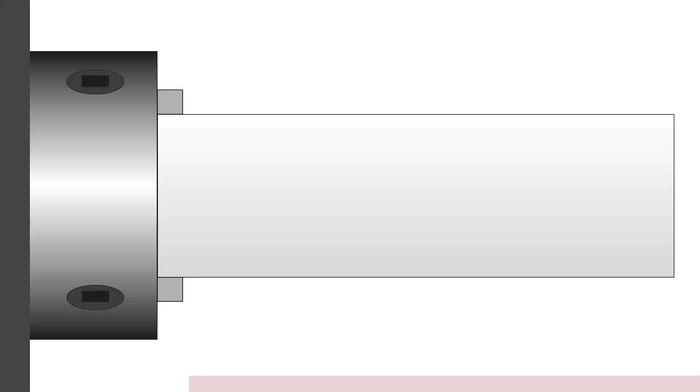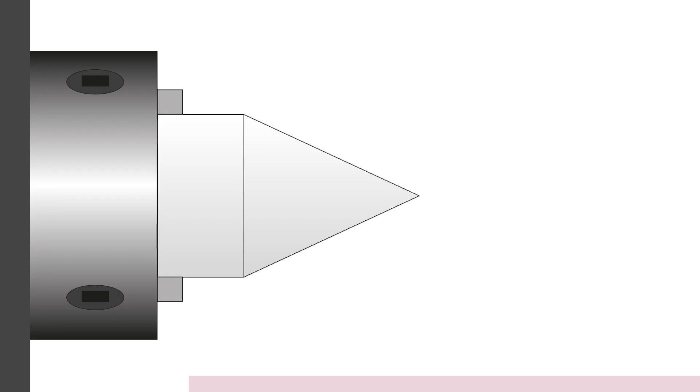The first process would turn down some of the end to the right dimensions and do the threaded internal hole on the inside. And then it would flip it around, and then on the other end you would create the cone, which would then create your ideal one-piece plumb bob, all to dimensions.

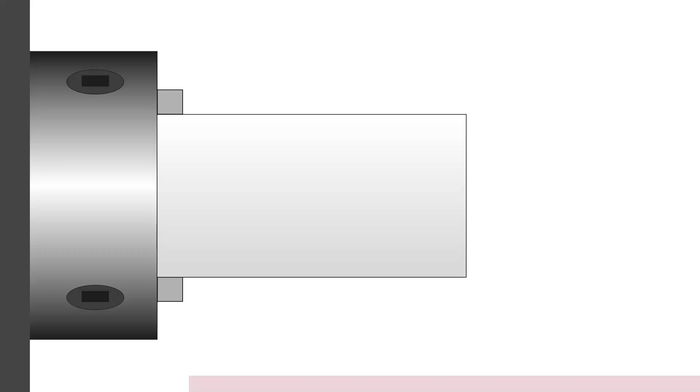But if I show you how we're going to do it, just because we don't have the length to play around with on our lathe, we are going to have the acetal set in the chuck, but the length of the billet just for the shaft part. Then if I show you this picture, this is where the machine will cut that shaft part, leaving a tiny little 12mm shaft right at the end that will go into the hole of the head.

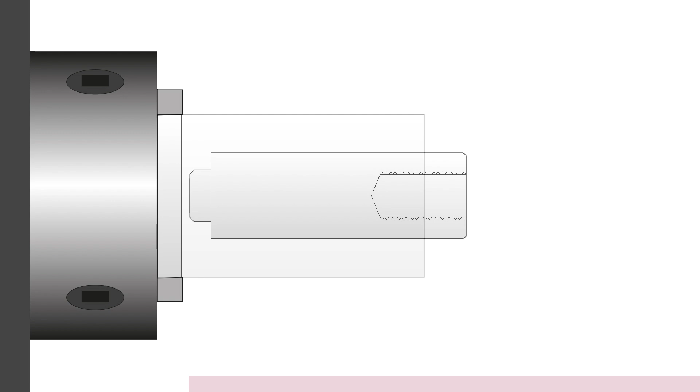Then we put in another billet just for the head piece, and we're going to cut an internal hole which is going to match the shaft of the other piece we've just made. And then we flip it around in the chuck and create the cone section. That'll leave you with two sections like this, and from there should be a nice friction fit of the two pieces together, and we can always add a little bit of adhesive to keep those together for this project.

The only other difference we're going to make is to the threaded section, because a tool has to come and obviously drill the hole first, so a drill bit comes and drills the hole, then the boring tool will come to basically extend that hole, and the diameter of that hole will increase, and then the internal thread cutter tool would come in and cut the threads.

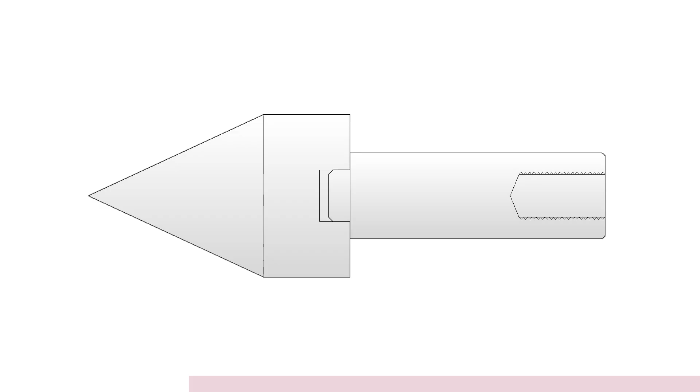The issue we have is the threads in the design that OCR have given us are too small for the lathe that we have, so we've amended that also to pretty much do an M14 thread pattern, a fine thread pattern. So the pitch of the thread is exactly the same as the M10 which they're specifying, but it's actually going to be a bigger hole, which should match the 14mm thread. So with those amendments made, we'll still be able to create an accurate plumb bob, but there's just a few different things that we have to do to get around it.

So heading over to TS Design, I want to set up the document so we can start drawing out the CAD file for the first part, which is the shaft part. So for this, I'm going to change the layout of the page and how it works. You're probably used to seeing it just like this, maybe with a blue background, but I don't like this shadow piece on the background here because it makes it harder to see where your measurements are.

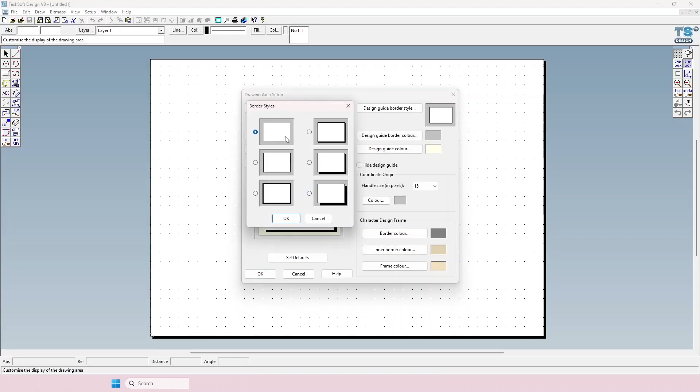So to take that off first, I'm going to go to Setup and Customize, and then Drawing Area. And then from there, at the top here, there's the Design Guide Border Style. I'm just going to click that, and then you can click basically the no border and hit OK and OK. And you can see it's got rid of that. This makes it a little bit neater to work with.

Then I'm going to change the dimensions of this file. So if you click on the layout icon just at the top here, you can put in a user-defined material size. So for the X, for this one, I'm going to put 70mm, and for the Y, we're going to be dealing with a 40mm acetal that we're going to cut down.

So I'm going to do 70 by 40, and I'm also going to put it in the design guide figures just there. Hit OK, and it's brought up the file to size.

The only difference I'm also going to make is on the grid. At the moment it's set to 10mm little dots. I'm going to make that a lot smaller, bringing it into 1mm. I've just double clicked on the grid there, 1mm, 1mm. I don't like the dots for this, so I'm going to hit lines and change the color to green. Hit OK, and now you can see your little 1mm grid for the piece that we're going to make.

This matches the way that Boxford Design Tools looks as well, so it's quite nice to set this up in this way because it makes it easier whether you're going to use the other platform or not.

So to start drawing this CAD file, we need to put a middle line on. This is your sort of center line. To do this, you would either draw out a rectangle from the top squares to the bottom squares and find where those middle anchor points are and draw a line across there. But I'm going to show you another way of doing it as well.

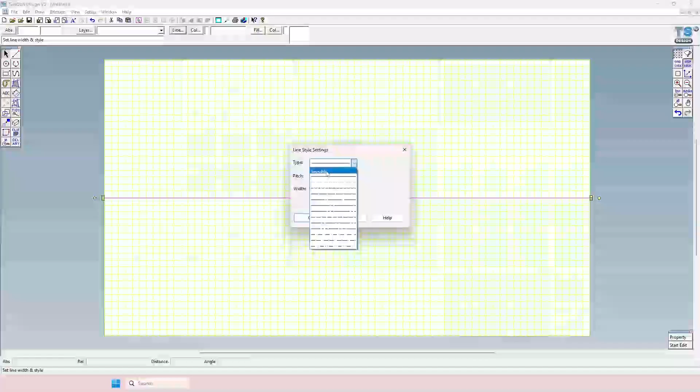We need to make it into a dashed line. So with it selected, hit the line at the top here, and you can see the type. You've got an invisible line, which we don't need, a solid line, a dotted line, but then a dashed line. So it's the fourth one down here. And for the pitch, for this, I just normally put 1mm. You'll just see a nice 1mm dashed line, and hit OK. And there we've got a nice center line that's dashed.

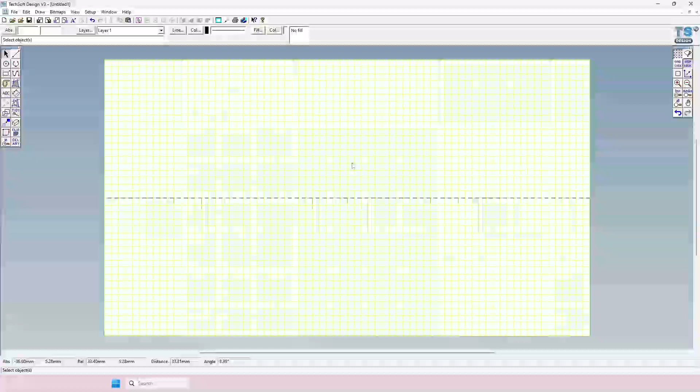So now we can start drawing out our main points of this plumb bob. I'm only going to be working on one half of the piece. You don't have to do the other half because when we save the file, the Boxford Design Tools will understand that we're designing this for lathe, and it will reproduce it on the bottom edge.

So if we know that the diameter of the part of the plumb bob here is going to be 20mm, we only obviously need to do 10mm on the top here. So any dimensions on this y-axis will actually be halved, but it won't affect the x-axis this way. So I'm going to start drawing some lines.

I've got grid lock activated because this is going to snap to the grid for every millimeter. In a minute there might be measurements which are like 1/4 of a millimeter, and I'll show you the best way of doing that even when you've got this grid activated.

So I'm going to start in this bottom corner. I'm going to go up 10mm, so I'm just reading the distance in this bottom corner just here, and it tells you how long the line is. So we've got 10 mils there. This one goes all the way across to...

59.25. So this is where I'm going to need to go into our grid spacing and set a 0.25 for 1/4 of a millimeter, and then I can zoom in a little bit.

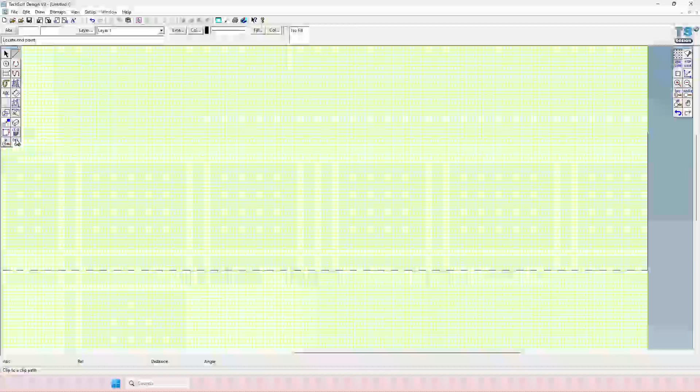Okay, I need to make sure I've got enough room on the screen to drag across my 59.25. I haven't got enough room, so I'm just going to bring the slider along. You want to make sure this is horizontal. So I'm at 59.25, and I'm going to hit there. Perfect, zoom out again.

That's looking good. I'm just going to bring this end line down to meet the center line. I'm zooming in again, going to click at the top of this line and bring it down all the way to the center line just here.

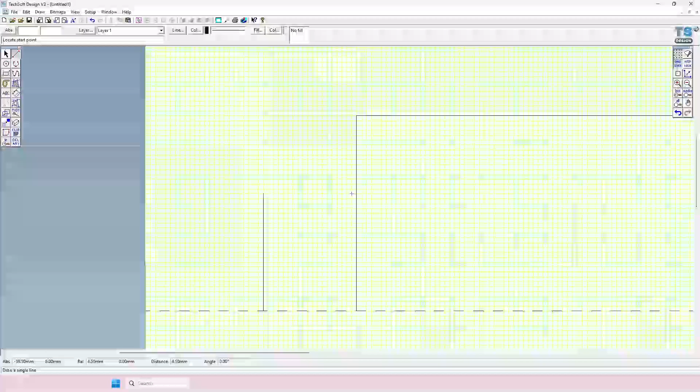At this end, we're going to have, in total, a 12mm diameter shaft, which is going to go into the other part of the plumb bob. We're going to do this at 5mm in length, and 12mm in thickness. Half of 12 is 6, so I'm just going to do a guideline and bring up my 6mm just there. I know that where this horizontal line meets it is going to be the line I need to make, but the length, as I said, is going to be 5. So I'm going to go to 5.

Oh, I was very close, I was just over. So what I can do is bring that line over one. So this is the shaft on the end.

I like to put a little 1 or 2 mil chamfer just in between these two lines. If you press and hold down on the line tool, you'll be able to go over to draw a chamfer between two lines. For the first and second chamfer distance, I'm just going to put both for 2mm and hit OK. I click on one line and click on the other line, and you've got that nice chamfer just on the edge there.

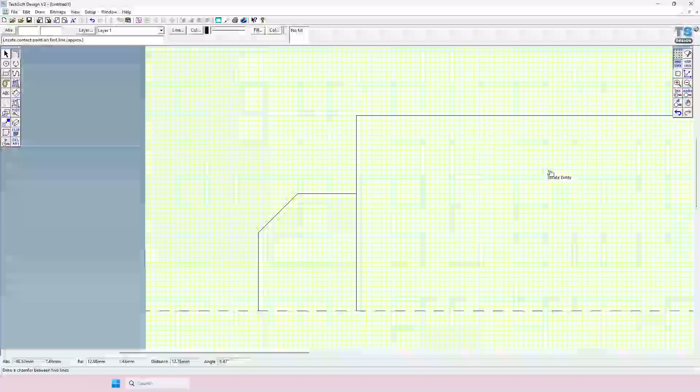I'm going to zoom back out. We don't actually want this line to be here now. We do for this outside edge, but this internal edge would just part off this bit, so we need to remove this. Holding down the delete button at the bottom, you can get to the delete part of an object. You should be able to just click on it, and it would make that section of the line disappear.

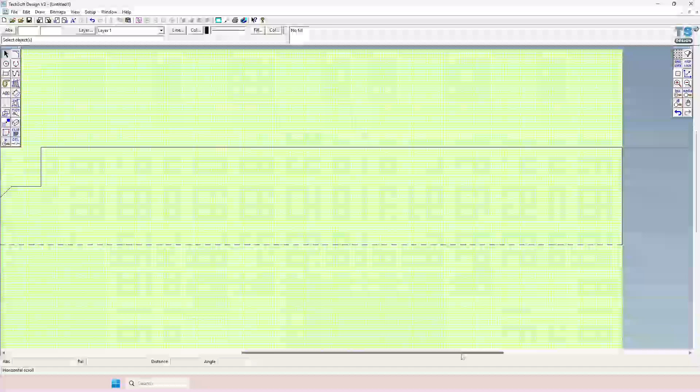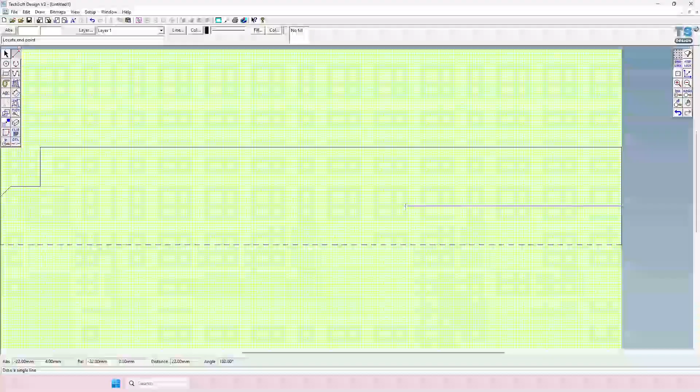The last part we're going to work on is the internal drilled section, which is going to be 12mm in thickness and 22mm long. So I might do a guideline for this. I'm going to draw a guideline from here across horizontally, and I want that one to be the 22mils. Let me just make sure it's nice and horizontal, so I know my line is going to join up to there. And in height, I said 12, so on this axis, we're going to do 6.

There's our 6. I'm just going to bring this line back up to meet that one, so all the lines should now be nicely joined. I don't actually need this section of the line that's in this hole, so I'm going to do the same way - just hit the delete key and hit that section of the line. That should leave us our nice shape that's going to be okay to take into Boxford.

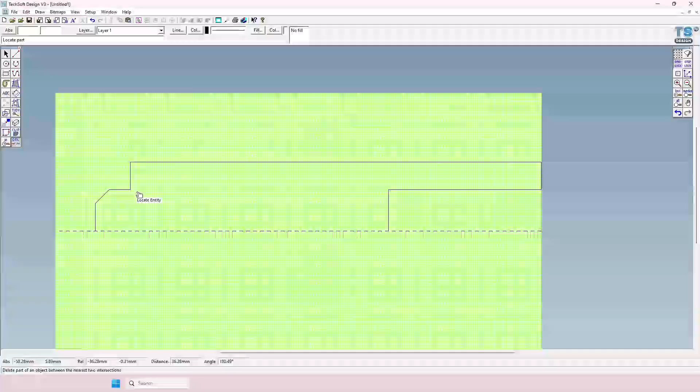If we was to take this into Boxford right this minute, it won't like the file, it'll kick up an error. It's because some of these lines are all individual lines. If I click on some of these, you'll see that they're individual lines. This whole outside shape needs to be one solid path - that is definitely excluding this center line. That can stay alone by itself there, but we need to make sure this is one path.

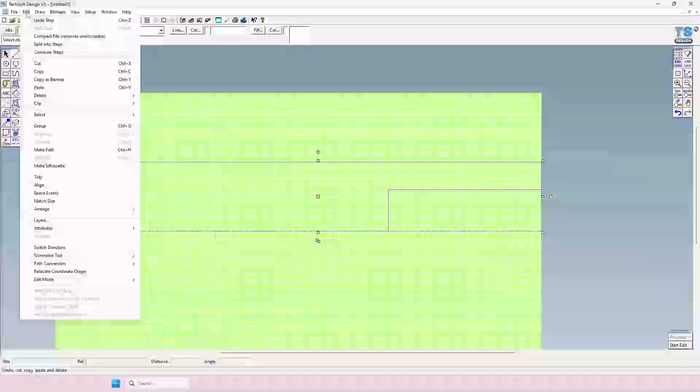So the easiest way of doing it is selecting it all, making sure our center line is not selected, and going up to edit, you can make path there, or Control and M, which is the shortcut. It throws up a warning saying this is going to basically join everything into a solid one path. Hit yes, and then it says make path completed. So if we click on this now, we can see it's one nice line, and our center line is separate to that as well.

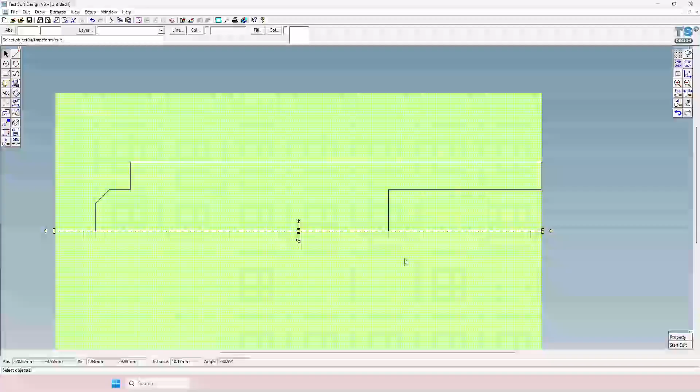If we need to make changes to this document later, if we find out we've done something wrong, I would ideally say save this TS design file by itself. The Lathe software, Boxford, won't be able to read the TS design file - we have to output it to another file type. But if we want to go back in and adjust this at any time, I would suggest saving this. So I'm going to save that now.

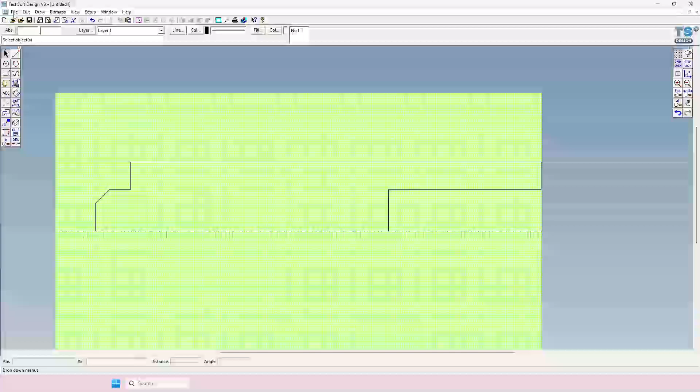After you've saved it, go down to Export File. When you hit Export File, you want to try and find the DXF file. This is a type of file which includes all the points that we need. It's normally a 2D plotted file.

Normally it'll throw up a little message just after you hit save. This is the important part: if you had any arcs or curves, this is how it translates those curves to the lathe. But for this file, we don't actually have any curves at the moment.

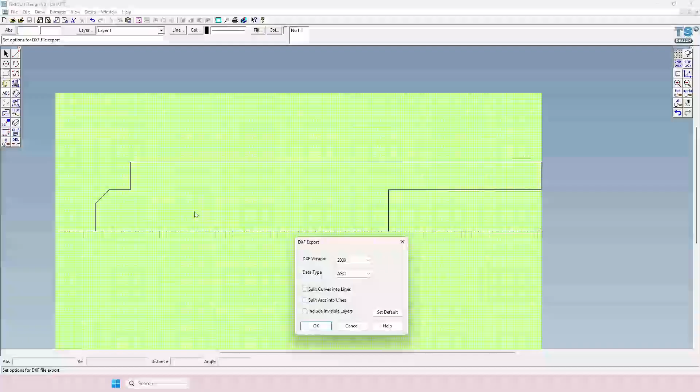I've left off any chamfers and radiuses on this piece because it's so much easier to do that in Boxford Design Tools. So we've just drawn the basic shape with no fillets or chamfers, except for the main one at the end there, but any smaller ones are easier to do in Design Tools. As we don't have any arcs, I'm going to leave those unselected and hit OK.

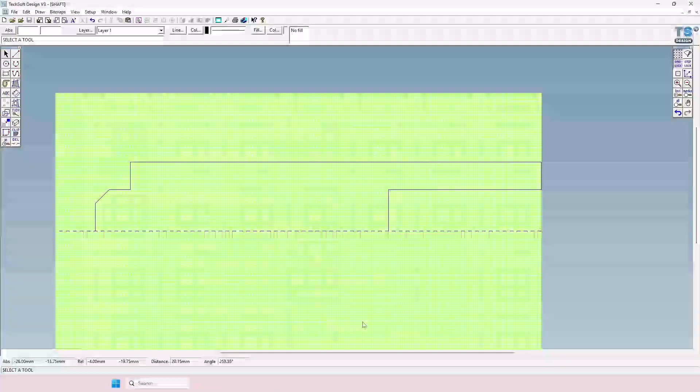This is saved, and now we're going to go over to Boxford and I'll show you what to do with it there.

We're over in Boxford Design Tools, just loaded up fresh, and I'll show you how to open that DXF file. In this first section there's a little file icon, we click on that. Down at the bottom there's a types of file list, and we need to find a DXF import file. We click on that, find where the file is, I can see it's there ready to import, click on it once and hit open.

An import window will open. This is where you can call it something, so I'll call it Plumb Bob Shaft, created by Mr. Fay. And this is where we need to change some of the dimensions.

The outside diameter, it's seeing it as 20 millimeters because that's how thick the shaft was that we made, but we've got to remember we're machining down 40 millimeter diameter acetal, so I'm going to put 40 in there. For the length of the piece, it's put 64.25, I'm just going to double check what we initially said on that one. It was 70 in total, so we'll input 70 millimeters in there.

And the hole depth, we did have it as 22, so it's worked that out from our file, which is great, so we'll leave that as is. And I'm going to hit OK.

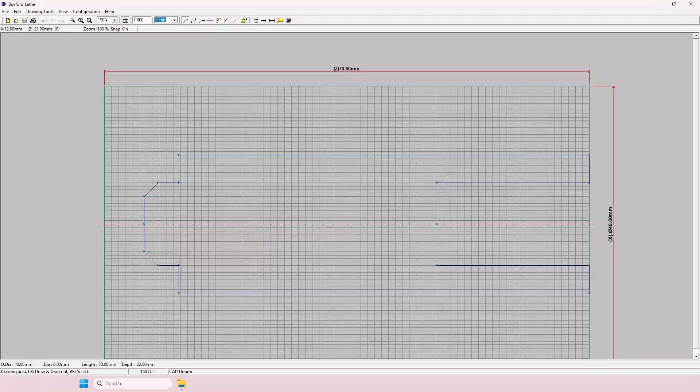Now if I zoom in, you'll see it's opened up in Boxford Design Tools, and you can see both halves of it now, so you get a clearer indication of what it's going to look like. This is where we're going to change some of the little radiuses I mentioned, but also include the threaded section into this piece as well, which we do in this software.

I've zoomed in now, and we're going to put that curved radius on the end. There's a couple of ways of doing this, and the easiest way is inserting a node. So with a right click on one of the lines, we hit insert node.

Now in between these two sections, if I hold down the right mouse button, I'll be able to drag things where I need them to be. For this, I'll go 1 millimeter to the left there, and this one needs 2 lines down, which equals 1 millimeter as well. This would be a 1 millimeter chamfer, but we want this to be a radius.

So I'm going to right click on it and say convert to arc, and then it moves around when I move the mouse. I want to bring the mouse up to this side, so it's a nice external arc, and click with the left mouse button. That's made a nice 1 millimeter little radius there.

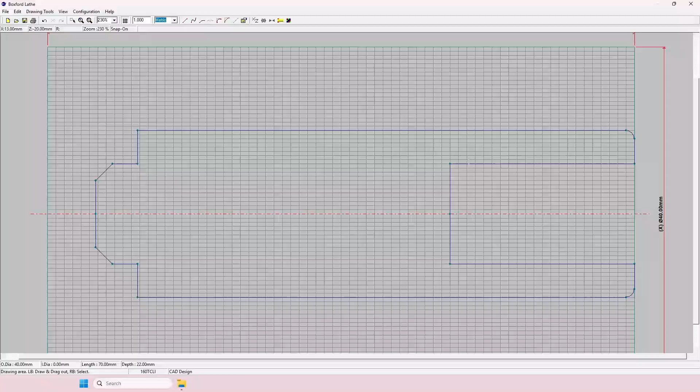Next thing is we need to add the 20 millimeters worth of thread. At the moment this hole is 22. That's because when the thread cutting tool comes inside and tries to cut the thread, we don't want that thread tool to be hitting the back blind part of this hole. So we're actually going to just thread 20 millimeters of the section and leave the other 2 millimeters absolutely fine as it is. So I'm going to right click on this line and insert a node, and right click and hold and bring that line down. So we've got 2 millimeters on this line, and then there's 20 millimeters on this line here.

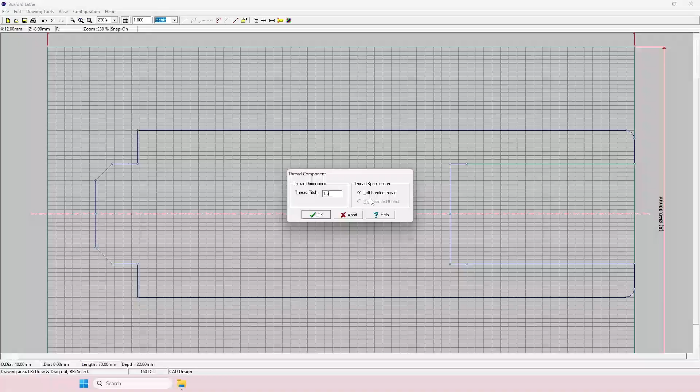We need to now convert this part into a thread. So I'm going to right click on that one, convert to thread, and it says thread pitch. A thread pitch is how many turns of the thread there will be in a selected measurement. So for this we want it to be 1.5, so we're going to put 1.5 in here. For the nature of this internal thread, we can only choose a left-handed thread, so that's actually going to be different to your righty-tighty, lefty-loosey type thread. This is going to be almost like an anti-clockwise thread, but that's all the option we get at the moment for this. And we're going to hit OK.

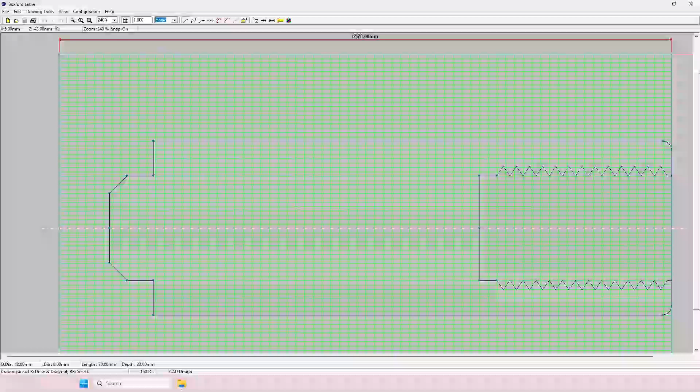And now in this diagram, you can see it's added that thread pattern to that 20mm section of the internal hole. I did forget about one more change that we do need to make to this piece for it to work properly, so it actually inserts into the head part of the plumb bob. And this measurement here of 12mm, that won't actively fit very well in a 12mm hole. It would just be so tight, there'll be a vacuum in between the two parts trying to insert, and you won't get it in.

So doing a few tests, I've worked out if we actually turn this shaft here to 11.9mm, so 0.1mm smaller, it'll fit really nicely, and there won't be any movement or any give.

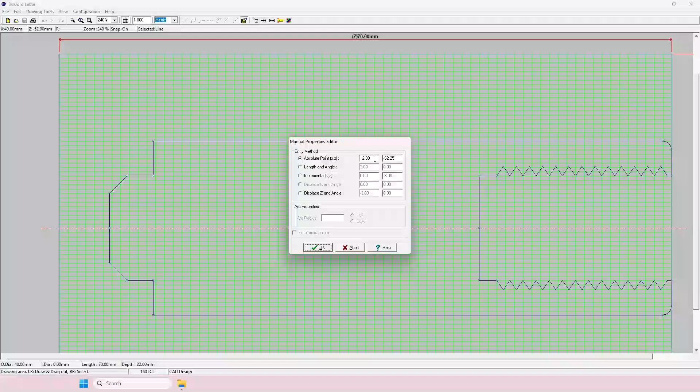So the way we do this is I'm going to hit the little icon here which says properties. I'm going to go and select this point here. You need to be very accurate with getting it on the point, and it will show you the coordinates of that plot, that part that you've just put in. So it's saying that it's on our 12mm thickness, so I'm actually going to change this to 11.9 and hit OK. And you may be able to see it's a slanted line now.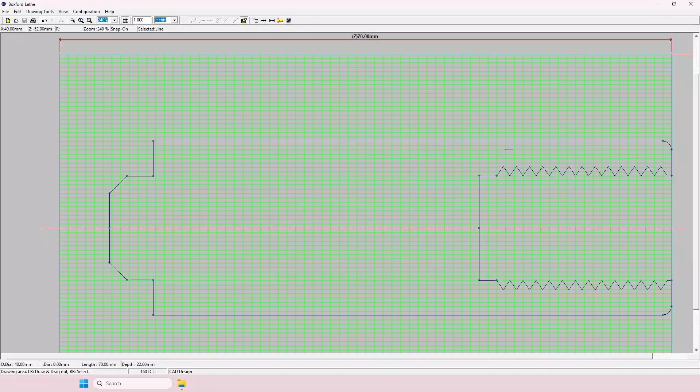So we have to do the same thing with this point just here. I'm just going to left click on this point and do the same, 11.9. Brilliant. So now when we've created all these pieces, they should fit really nicely into one another without any issues.

If we save this now just as a file, because we can edit things if we save it as a file, I'll just put shaft there.

And we can also do a little bit of a 3D view. So if you go up to view and come down to launch 3D render, we can hit that one. And a render spinning out of control turns up on the screen. So I'm just going to click the letter F on the keyboard and it'll just freeze it.

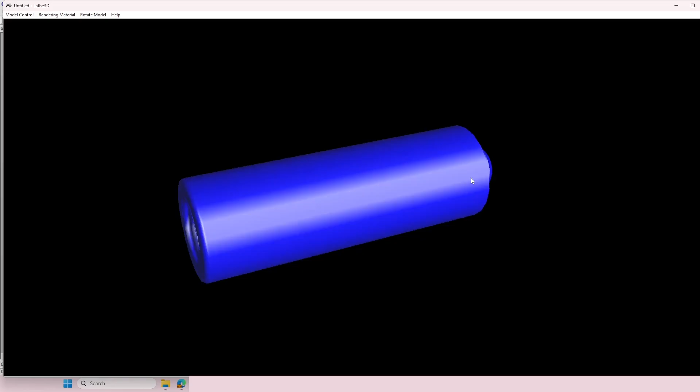And I can actually bring this larger, and you can actually click and drag this piece now. So you can see here's the sort of peg shaft end that we're going to put into the other piece. And we can bring it around and you can see now a threaded hole on the inside, and you can also see that little curved radius on the outside edge there. So I'm happy with that. I'm just going to close that window down.

And now we can begin to process the billet, and I'm going to show you how to do that. So as long as no changes need to be made, I'm going to click File and go down to Process Billet. So here, this is where you get to select the material that the piece is going to be made out of. The reason why we input that is it will do different depths of cuts for certain things. So imagine you had steel or aluminium, you want to do really fine light cuts, otherwise you'll destroy the tool.

If you set this to plastic, which we are going to be making out of, it'll do a bit more chunkier cuts, and it'll allow the cutter to do all the work for it. So I'm going to hit plastic and wax there. The diameter we said is 40mm. That's really important because we're machining 40mm. Inside diameter, we're not necessarily worrying about that because it's not a tube. And the length of the piece is 70mm. I'm happy with that. Hit process.

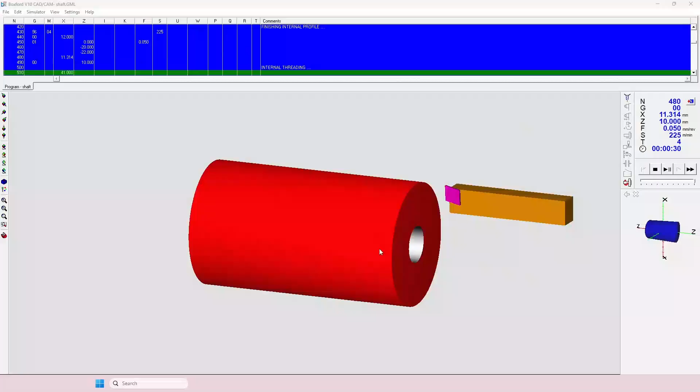It'll get you to save it as a GML file. So I'm just going to hit save there. And now it's going to run very quickly through the cuts that it's going to do on the lathe. I'm going to slow this down at the moment. That was writing the G code as it was working it out, and it's finished now, but I can bring the speed of this down and start it again just so we can talk through what it's going to do. So I'm going to hit play.

So it's going to do the face-off cut, and then the first drill comes in, the second drill comes in and drills the hole to the right depth. Obviously the diameter is not right, so the boring tool will come in and it will make that diameter of the internal hole larger. And then the internal thread tool comes in and it starts cutting the thread for this piece.

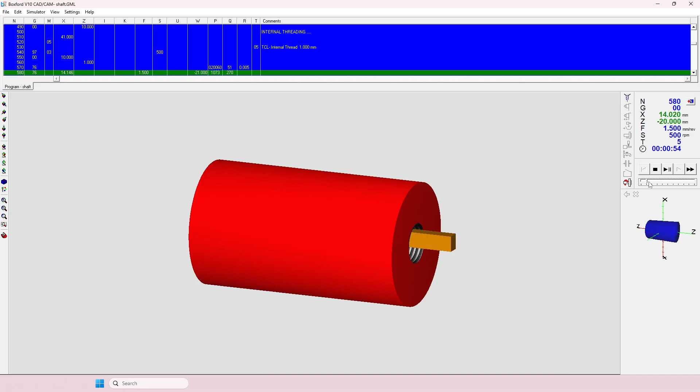It does it in lots of passes, so it's lots of light cuts that makes the tool not as stressed as much as if you did really heavy cuts, and also you get a finer, higher resolution cut as well. And then you'll start to see the parallel cuts, which we are familiar with on the lathes, and it's getting down that 20mm diameter. So it's doing it in nice slow passes.

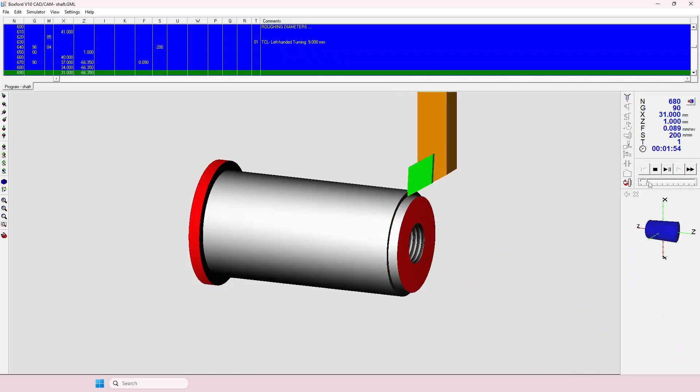For this, I'm going to speed it up just a little bit just to show you. There we go. And then it's going to do that little radius at the end as well when it gets to the 20mm. Then it's going to start removing the bulk of the material down this end, ready to part it off and create that little 12mm section as well.

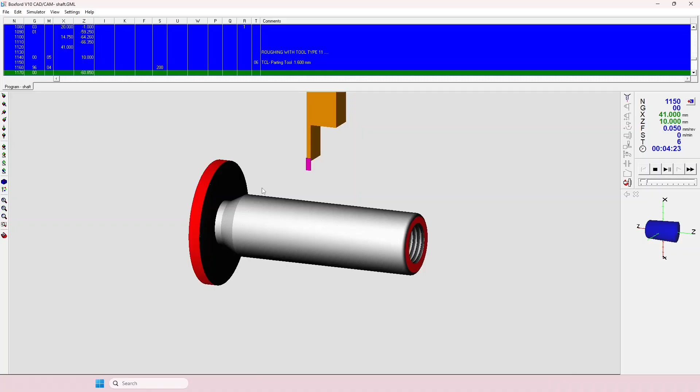So here comes the parting tool. It's going to come down, make that shaft, and then it's going to cut off. Then the tool goes back to a safe position and goes back to the default tool. So I can bring up a cross section just to show you what that would look like. So the internal hole there, with the threaded section, and at this end there is the pegged sort of shaft that was going to go into the head part.

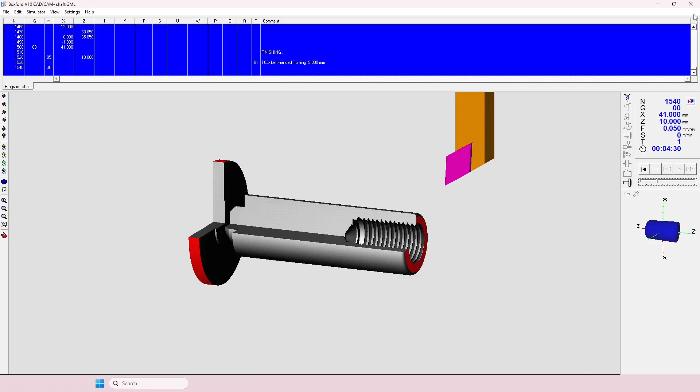If I close this one down now, it's up in our main viewer, and we can actually send this to the lathe straight away. This is going to work absolutely fine as long as the lathe's set up and calibrated, and that means we can work on the next piece.

So I've come into TS Design to start creating the rear part of the head. I've taken the shadow off of the layout because, like I said, I don't necessarily like it there. You can't really see the edge of the document very well. So I've turned that off, and now we're just going to size up the document and change the grids. So going to hit the layout again, go to user defined. I'm going to put the material size in.

So I know for the x-axis for this one, we're going to do 47.75 by the 40mm, which is the width of the acetal. Once again, put it in here as well. 40 and hit OK. Happy with that. And now I'm going to just change the grid. So with the grid, I'm going to double click. I'm going to go to 1mm here, 1mm here. Going to go down to lines and then turn it green. This is just personal preference. Like I said, it just matches how the Boxford one looks.

And to draw that center line, we're going to move that origin to automatically tell us where halfway is, so we don't have to measure anything out. So the icon up here, relocate origin, hit the top, middle right just there, and hit OK, and we can see it's moved. And then I'm just going to draw the line across on that horizontal, and then select it and hit line, and then we can select it as the dashed line, not the dotted line, dashed line, pitch of 1mm, and hit OK. And we can see it there.

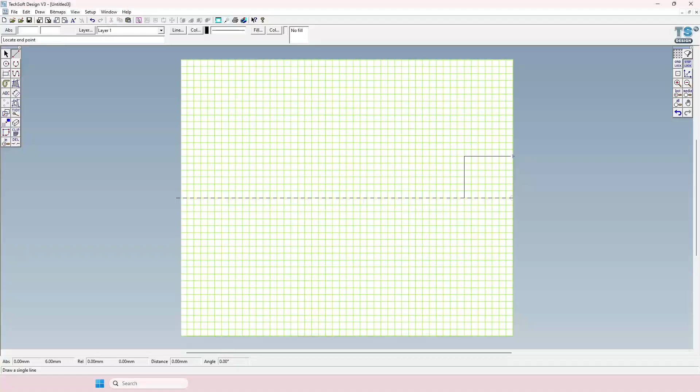There. And then I'm just going to move one little section up there. So it's going to remove this part of the width and just then come upwards and finish there. Like what we did before, these individual lines that we've got, we need to make to a single path.

So I'm going to select them all again. Just a note, excluding the center line like we did before. So just the lines you've got drawn here. And then we go to Edit and Make Path, or Control and H. Hit yes, and it says it's complete. So we've got one big path line there and our center line there.

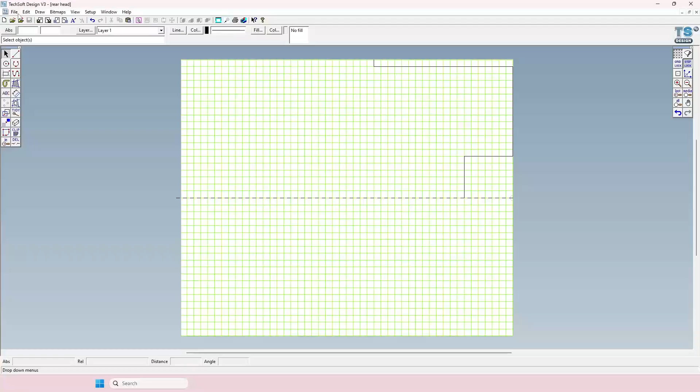Like we said, if you need to come back and change this in any way, it's good to save it. So we're going to hit Save As, save it to rear head. There we go. And now we need to convert it to our DXF file. So go to Export File, rear head, that's fine. Once again, we don't have any arcs or curves in this piece, so I'm happy to not select these two. I'll just hit OK as it is.

And that's saved. Once again, we can go over to Boxford just to see how that translates in Boxford Design Tools. So back over to Boxford Design Tools. I'm going to hit the CAD open file just there. Remember, we just need to bring that drop down to DXF import and find our file. Found our file, and we're going to hit open.

Same prompt windows come up, so we can call that Plumb Bob rear head, created by Mr. Fay. So outside diameter is 40, that is correct. Inside diameter, no need to worry about that one. The length, it's only reading the part that we've drawn, so it's saying that the length of the piece is 20 millimeters. For this, we do actually want to call it 47.75. And the hole depth, that's picked that up nicely, which is 7 millimeters, that's right.

So here you can see we've got our whole section drawn here. We've got the section which is the 38 millimeters. If we want to double check that, there is a little measurement tool that you can toggle up here, and you can see then the measurement does actually read as 38 millimeters, and it's saying that our billet is 40 millimeters, which is correct. This is one of the easiest bits, so it's just a case of processing this one.

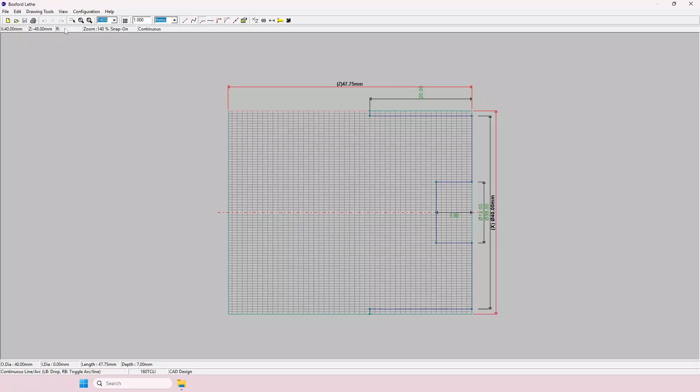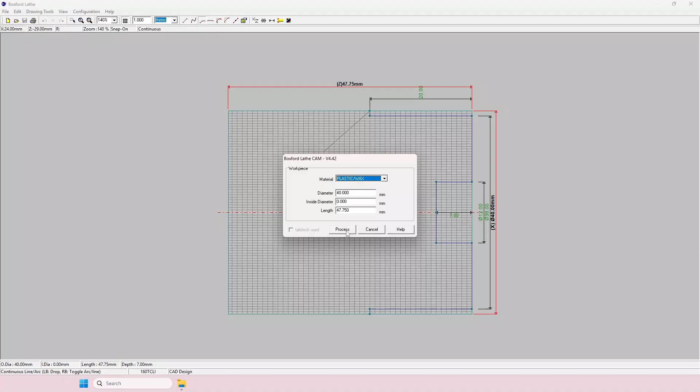So you could save this here, or you can just go straight down to Process Billet. So for this one, I'm going to hit Process Billet. I haven't saved it at the moment, so I'm just going to hit yes anyway. And we're going to say rear head. Once again, we're going to put the material in with plastic and wax, and just double check that all these are correct. They are. And hit process. Save this one as rear head.

And it's going to fly through the programming as it writes the G code at the top there, and it's really quick and short. So it's done that in no time. I'm going to slow it down just so we can see it again. So if I hit play, it's going to do the face-off cut. Then it goes to the little center drill to make the center hole.

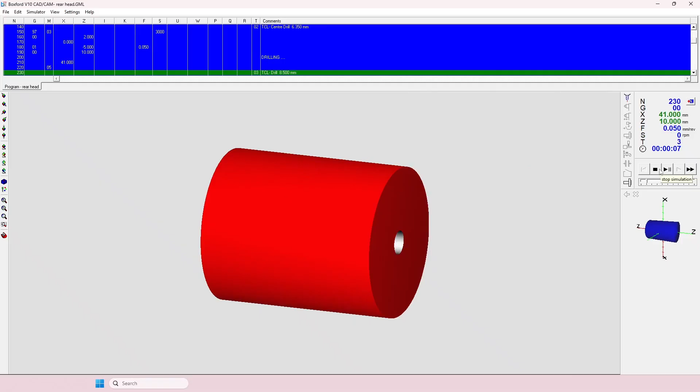And then it's going to use, I believe it's an 8.5 millimeter drill bit that's selected in the machine, and then the boring tool makes that bigger to the size it needs to be. Then the left hand cutting tool is just going to take the width down to how we want it, and that's it finished. If we close that one down again, now you'll see this is okay to send straight to the lathe.

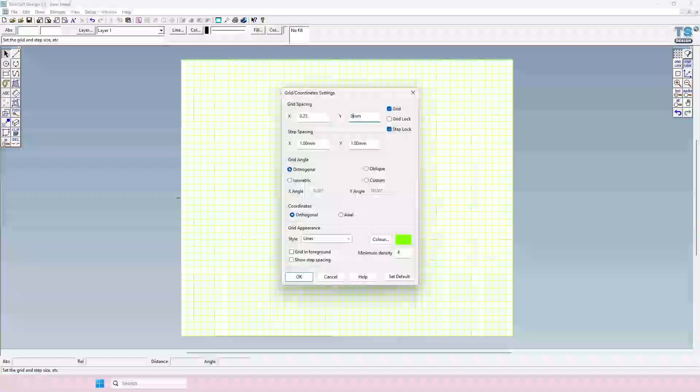So I'm just going to delete the bit that I've drawn and keep the center line there. To do the cone section, we need to just basically draw a diagonal line, and we need to do that to the right dimensions. So I know that the full length of the cone is 40.75 millimeters. So I'm just going to go back into our grid options, and I am going to do 1/4 of a millimeter measurements, just because we're dealing with that fraction of a millimeter.

Okay. Once again, I'm going to do a guideline just so I can see where the 40.75 is. I'm just going to make sure I'm doing a nice horizontal line. Oh, I'm on step lock at the moment. That's not actually going to work. I need to be on grid lock. So that's 40.25, 40.5 and 40.75. So I know that I'm up here.

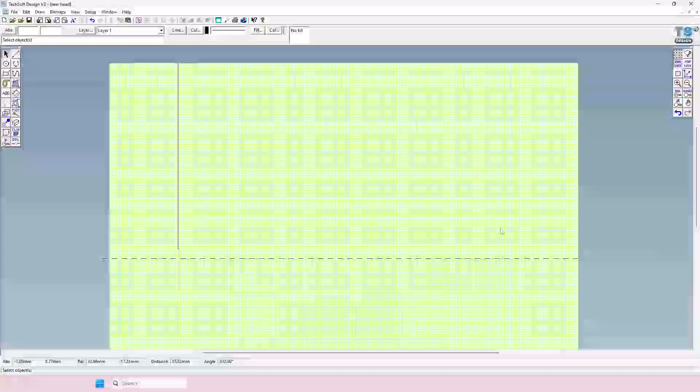I'm going to do a line off of that all the way up. I'm just going to make sure I'm doing a nice horizontal line. Perfect. I can delete that other line now. That was just a guide. So I know if I go from the center line here all the way up to the top of my line there, that's exactly the angle that I need.

So for this, I'm going to hit the line tool. I'm going to find that origin point and bring it over to meet that line. So that's the right angle and the right length. I'm just going to now delete this one. Don't need this one. If I was to take this to Boxford Design Tools, it would throw up an error because it doesn't see this as doing like a cut, a pass.

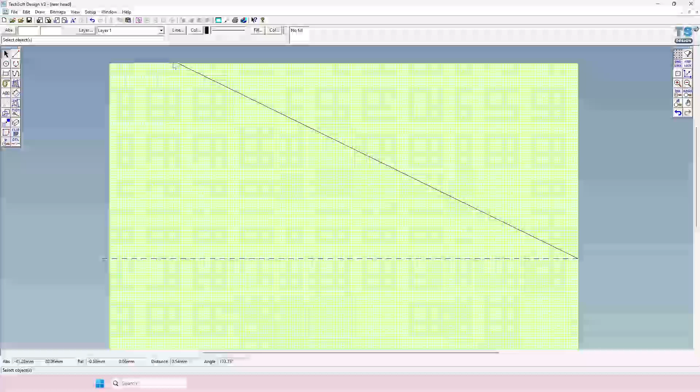I just need to put a tiny horizontal line off of the top of this line up here. So if we zoom in and just draw a little line from the line, so that's like 0.5 millimeter. It doesn't really matter how long, just need to have that drawn. And it's still going to see these as two separate lines.

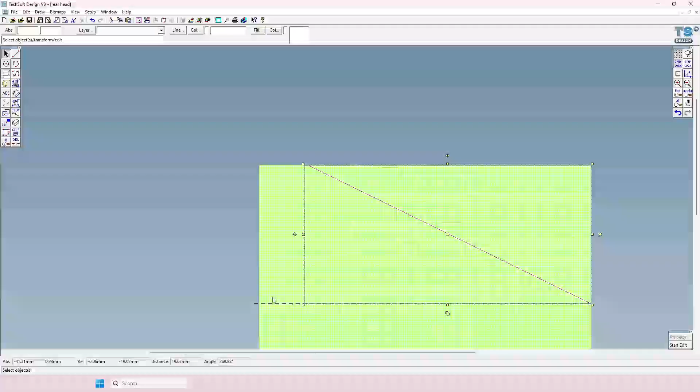So once again, highlight the two, making sure the center line's not selected, Edit, Make Path or Control and H, hit yes, and OK. So that's now made it as one path. So we can save this as well. I'm going to call this cone.

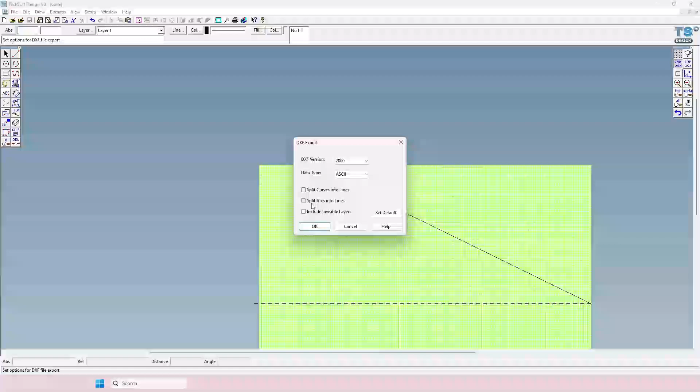And we need to now export it as our DXF file. So go to Export File, DXF file selected, that's absolutely fine. Hit Save. Once again, no curves, so I'm not selecting these two, and hitting OK. And then we go back over to Boxford. So I've just opened up Boxford and I'm going to select CAD Open. I'm going to find my DXF import and I can find my cone file which I've made.

Once again, it's asking for data, what we're going to call it. So if I spelt it right. Actually, I'll call it Humbug Cone, Mr. Fay. So outside diameter 40, that's correct. Inside diameter we don't need to worry about. The length of the piece, obviously, it's only counting for what we've drawn, but I need this to be 47.75. Hole depth we don't have to worry about.

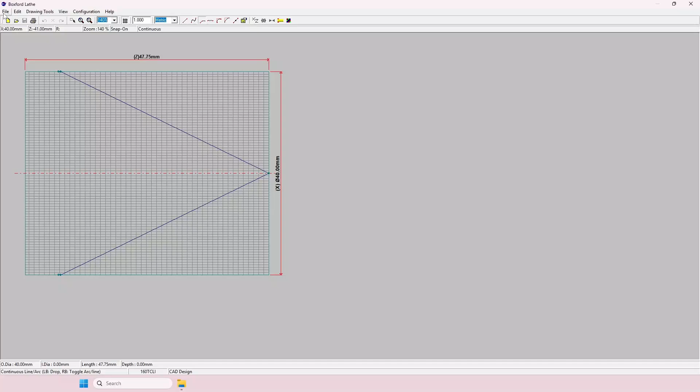Hit OK. So you can see it's made a really nice cone shape there. Nice and simple. We can just go and hit process straight away. So we're going to go down to process billet. Hit yes, just to save. Call it cone. Going to go down to plastic and wax. Just double check that it's 40 millimeters by 47.75. That's correct. And process. And hit save.

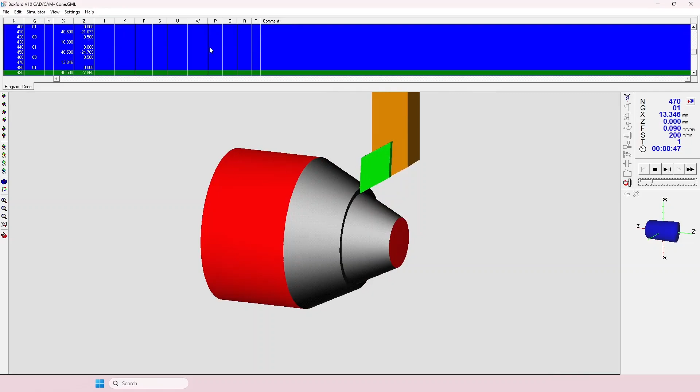And it's going to zoom through the process. If I slow it down as it's doing it, there we go. You can see that it's creating the G code at the top here as it's working out each cut. And you can see it's doing it in multiple passes. I can't remember what we've set the depth of cut for cutting plastic, but we're talking like less than 1 millimeter each cut. And there we go. So that would cone that end really nicely.

But I hope that helps. That shows you how to use TS Design to draw the CAD files, bringing it over to Boxford Tools to create it ready for the lathe. And obviously, after you've done this example, you'll be on the lathes actually programming it into the lathe and making it work.